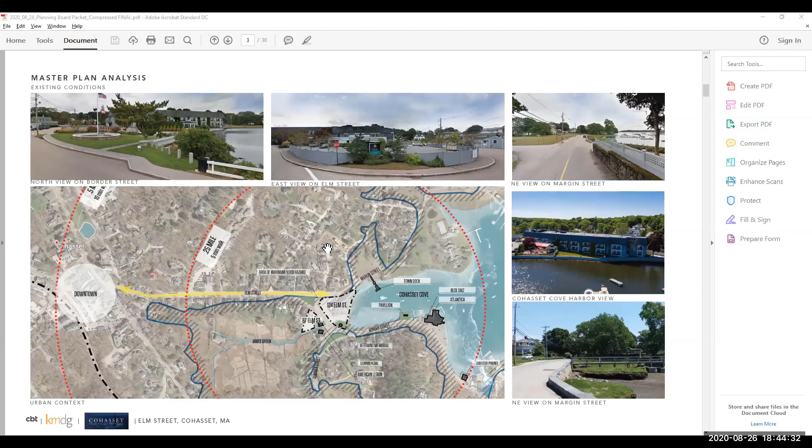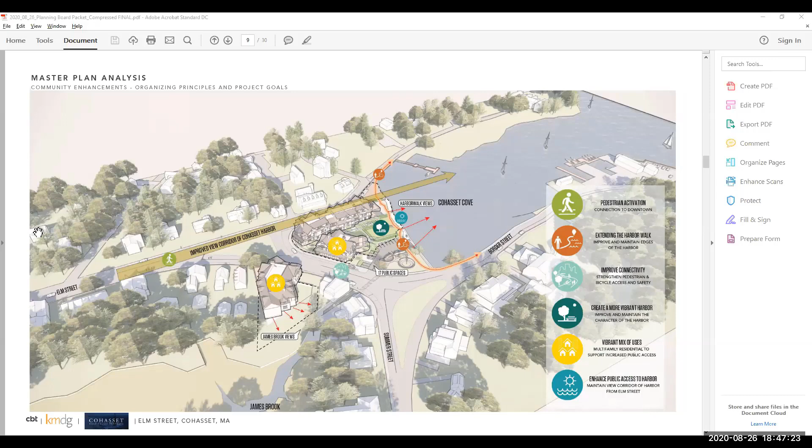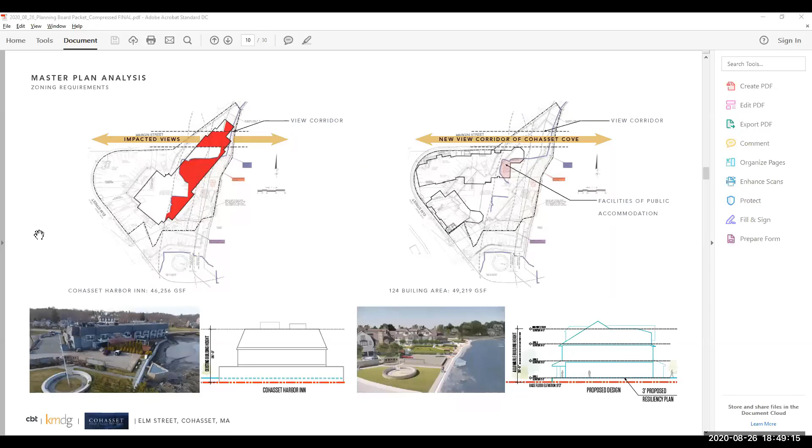You should also note that these are just diagrams. So in the diagram of the proposed, it appears that there's a flat roof condition when in fact there are really no flat roofs being proposed. Anything flat is contained within a well within the roof line, fully shielded from view. I think that swiftly gets us through that overview. And from here, I'd like to hand it off to our landscape architect partner, Jen.

Hi, I'm Jen. I'm with Klopfer Martin Design Group. I'm going to try to unpack the site plan a little bit, and in doing so address some of the questions that we heard. And so this diagram is the landscape design parameters diagram that we started out with in the beginning of the project. The red dashed line shows the Chapter 91 boundary, and within that, between the dashed line and the seawall, there are two public land zones.

There's the water dependent use zone and then the facilities of public accommodation. Within that water dependent use zone, there's the 10-foot harbor walk and the 25-foot no build setback. And then the Elm Street corridor, which is aligned with the south side of Elm Street.

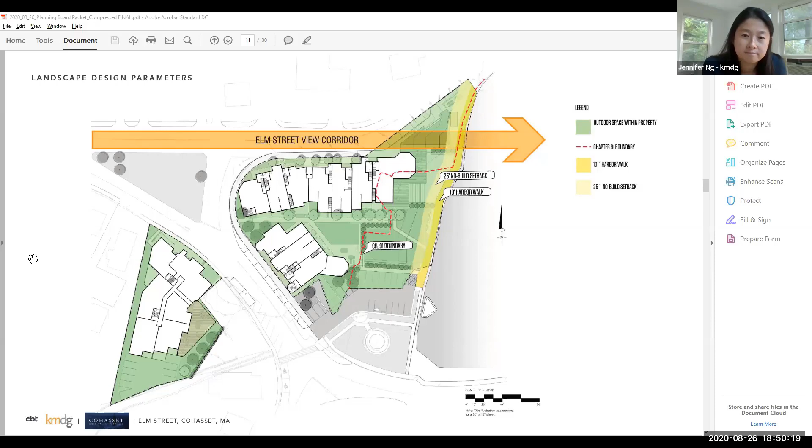One of the questions that we heard was, have we done any FEMA analysis? And we actually have done quite a bit. And so we really felt like we wanted to reveal that part of the site design a little bit. So the site sits on 3 FEMA zones, base flood elevation 11, 10, and 9. And the guideline that we're following is that the building first floor elevation needs to be a minimum of 1 foot over the base flood elevation.

So 124 Elm is actually set to elevation 12, and the landscape slopes and steps up to support that so that it's not a walled condition. And then at 87 Elm, the first floor retail is set to elevation 10, so 1 foot above. And then the residential is actually set to 15, so quite a bit above.

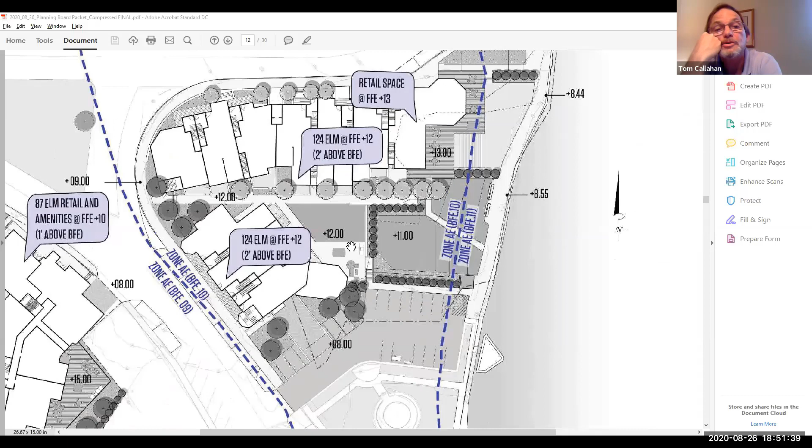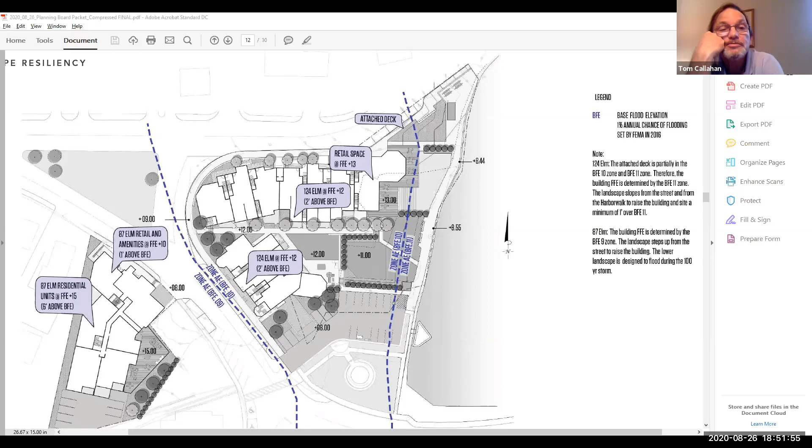So the next slide. One of the questions we heard from a number of people across both previous planning board meetings was, how do you know when you're in the public park versus the private park, and where is that line? That's a really good question, because we purposefully tried to hide that line as much as possible so that when you're in the public park, you get the shared view of what's going on in the condo area.

The other thing we wanted to show with this public open space is that we actually exceed what the Chapter 91 designation suggests, most notably in that northeast corner headed towards Margin Street.

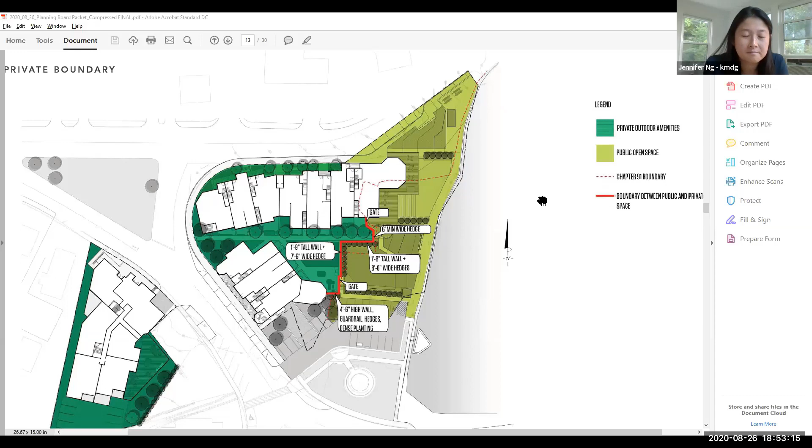So the buildings are purposefully put towards the street edge, and what we're trying to do is create a sense of a neighborhood, that the doors are facing the street, that there are more eyes on the street, and that you start to create this sort of front porch, front stoop culture where people are part of the street, not necessarily just in their homes.

And then trying to be really strategic about where we place those open spaces to further support the view corridors—not only the view corridor on Elm Street, but also the view corridor that goes right through the 124 Elm buildings, and then also through the parking lot.

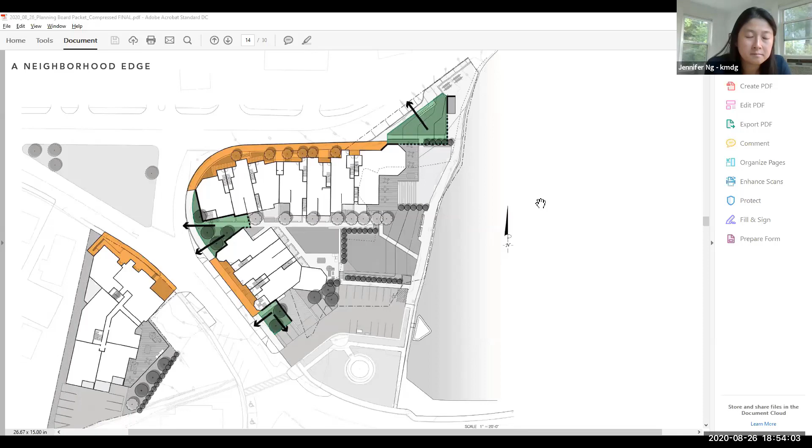So the new Harbor Walk has a series of rooms connected to it, and those rooms offer different programmatic opportunities. There's the vet park at the far end, which is not on our site but is experientially part of it, the public parking, the sloped harbor lawn, the harbor terraces which offer spill out from the retail and are more of a plaza or patio feel, and then the Margin Street Park.

And the Margin Street Park is noted where it is because as we think about seasonal or annual festivals, such as maybe the art festival, having an opportunity to have an installation or a tent or a kiosk right on the street to draw people in towards the park, we think is a good opportunity.

And then historically, the hotel is kind of right on the edge of the Margin Street property line, and so we're really trying to extend the sidewalk that's there as far as we can on our property line to help facilitate that town dock connection.

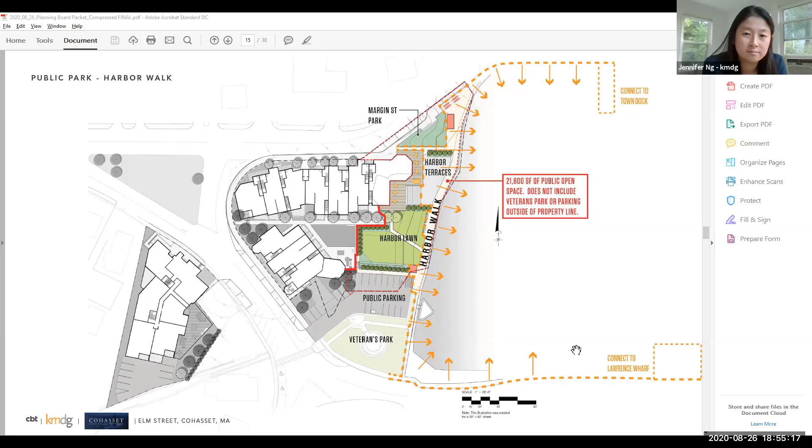And then we've already talked a lot about parking, but just wanting to reiterate that there is public parking on the site, and that it's been integrated into the public park, and that even with the additional level of resiliency we're trying to add through the FEMA analysis, we are committed to an accessible path of travel that gets you to the retail zone.

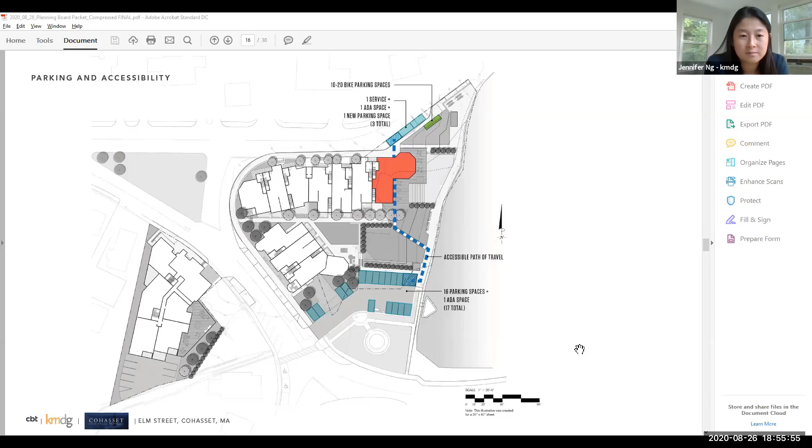So this is the illustrative site plan, and hopefully it kind of helps to unpack it a little bit more, answer some of the initial questions, and keep the conversation going.

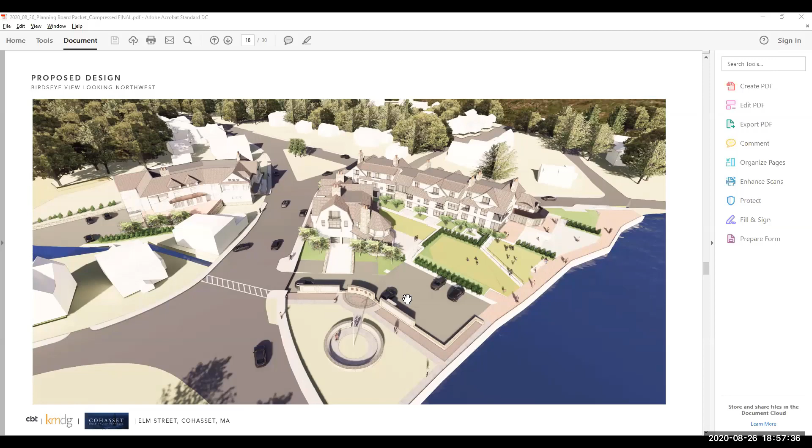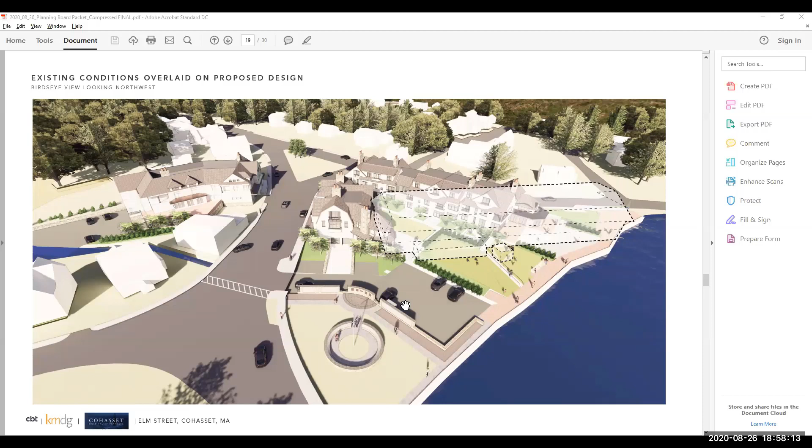This next slide is the exact same view superimposed with the existing massing of the hotel. We've heard plenty of conversations before about what the comparison is, and this is meant to offer a quick look at the two in conjunction. As you can see, the mass of the form that exists today imposes upon any views laterally across the site, down the view corridor of Elm, or through the center, and certainly doesn't afford the same integration at the water's edge.

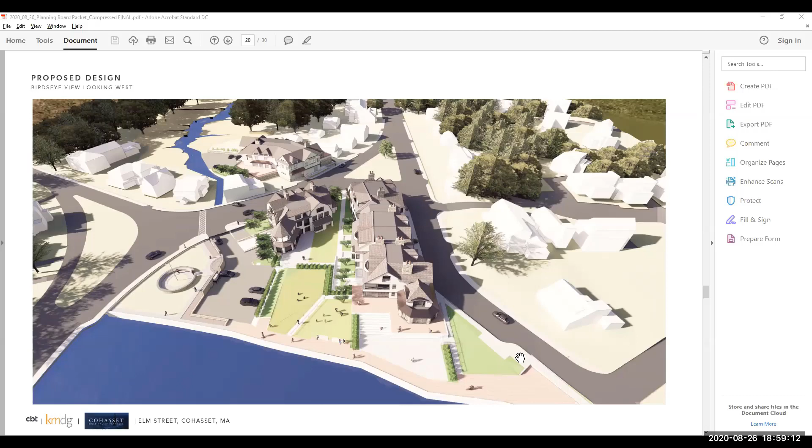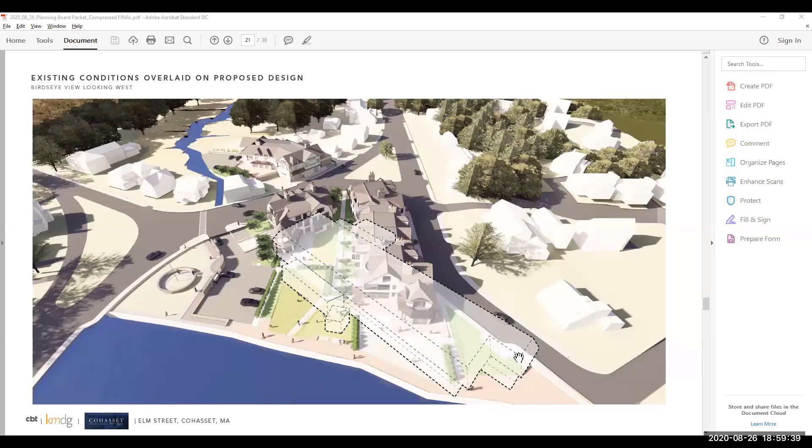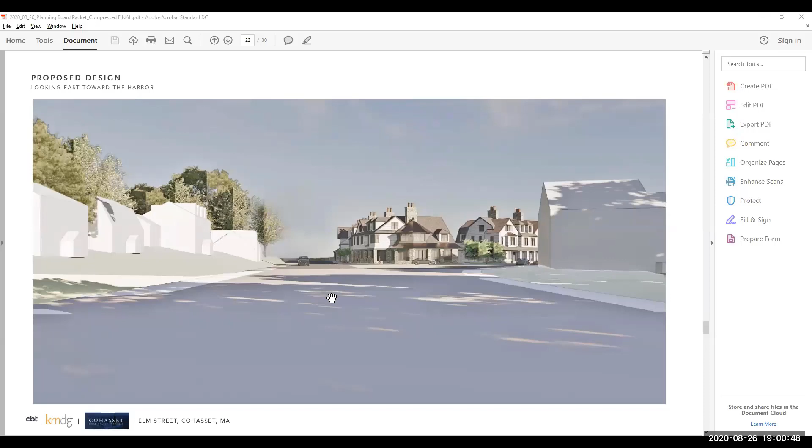In comparison to this real life photograph, here is our proposed view, which clearly illustrates the opening at the water's edge and into the harbor for a view corridor. It demonstrates how the residential form of the proposed building at 124 frames this view in compatibility with the residential profiles on the north side of Elm Street, in a very suitable, expected neighborhood fashion.

Continuing closer down Elm, we see that same effect, and you begin to get a feel for the architecture and the profiles offered at 124. You can see how the edges are softened and everything is moving back away from the street while still offering that pedestrian scale.

Another pedestrian look at Elm Street as the road begins to bend to the south. In this image, note the sensitivity to the existing neighborhood fabric and scale, the use of materials - stone, wood shingles, painted trim, copper, glass - and the proposed relief across the facade, with openings at the street level, recessed elements, and stepping back along each face. Note also the accent detailing and the careful roof design, inclusive of chimneys, gables and gambrels, dormer features, and the roof elements dressed in a soft edge as it transitions to the body of the house.

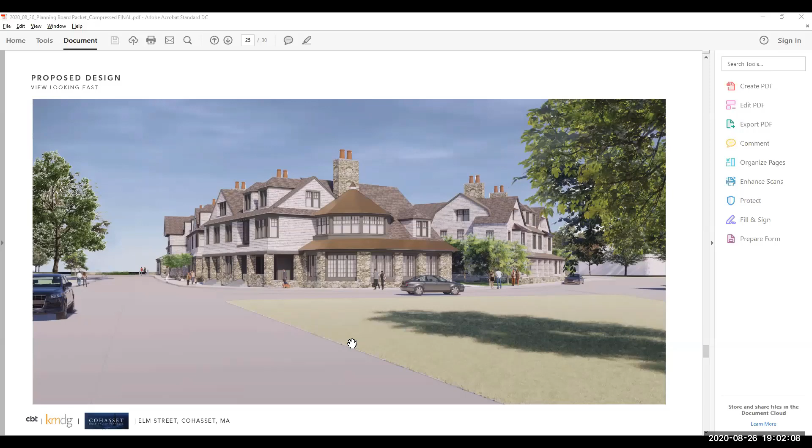This future vision depicts our full engagement: the harbor, the public, the residential element, the amenities, all existing together in a certain harmony - a vision for what could be here at this corner.

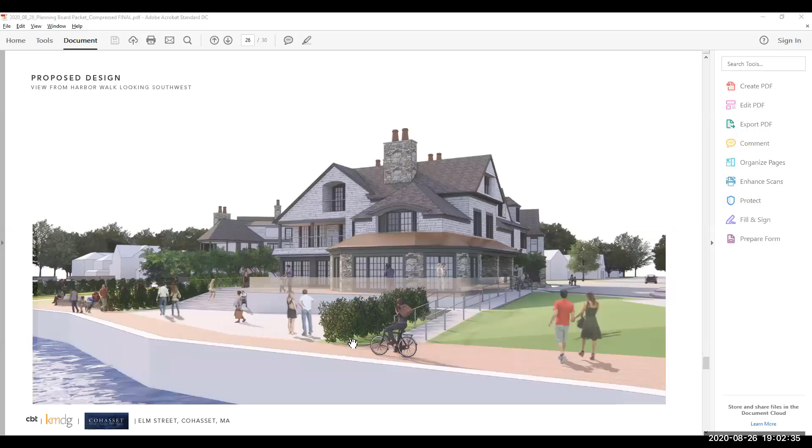Then we consider 87 Elm from a different position - this perspective is a pedestrian view on Summer Street, looking to the north or northwest, with the Legion building in the foreground to the left. The proposed 87 and 124 residential forms nest on either side of the street in respect to one another.

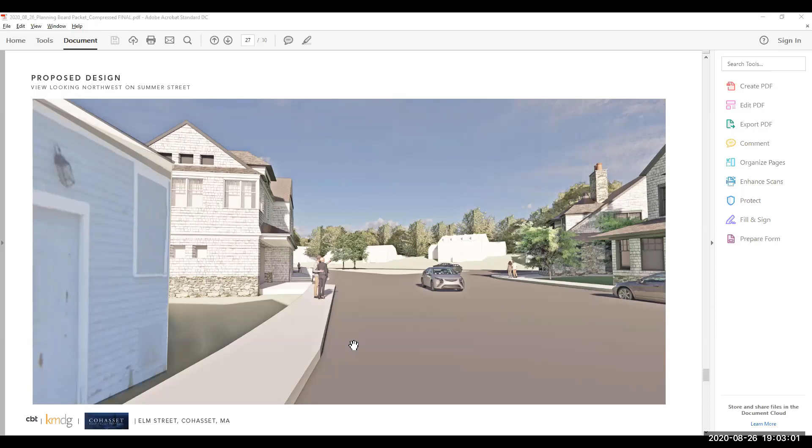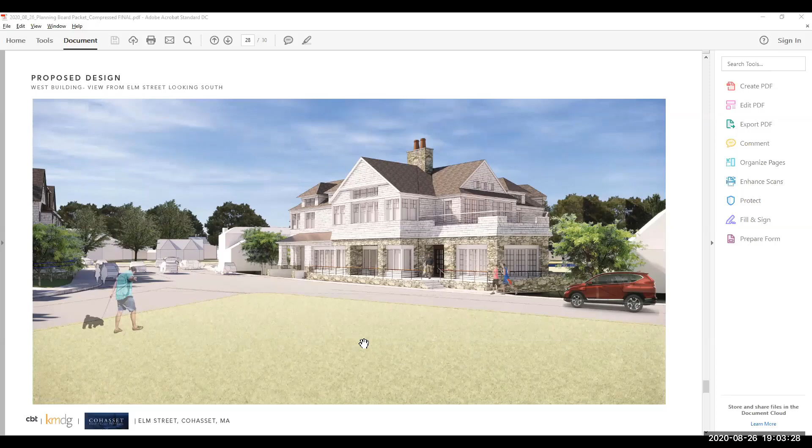From the Island Green at Elm and Margin Street, we see these classic expected roof lines at 87, the strong chimney, the New England wood shingles, and the stone palette in harmony - a compilation in keeping with and complementing its neighbors, both here immediately and throughout the Cohasset community.

To conclude, this aerial photograph as it is today shows the hotel as graphically represented in the earlier SketchUp models, followed by the same beautiful photograph of Cohasset Cove as proposed.

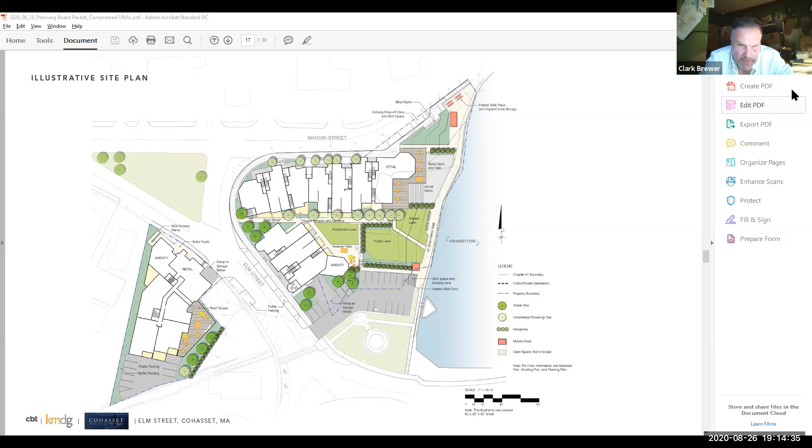Well, I understand, like at Harvard Yard, all those paths were created by people walking on the grass, and then they paved them over because there was nothing they could do to stop people from walking. But in this case, you're creating this large public space, but then you're bisecting it with raised guardrails and handrails, and so if you're rethinking that, that makes sense to me. Yes, we are rethinking that. Okay.

Is that all your comments, Clark? Those were my comments. Oh, one more: I didn't see a detail of the guardrail that goes to the ramp into the parking area. I'm sure there'll be one, but I think it makes sense to show the board what that looks like at some point. All right. So let's move on to allow the peer review to make the presentation. Can I ask just a question? Yes, you can ask the factual question.

All right, so Jennifer, when you were talking about where the first floors of the proposed buildings are, I believe you said they were anywhere from elevation 9 to 15. Is that correct? So 87 Elm, the ground floor retail is set to elevation 10, and then there is an interior stair and elevator that takes you to the units, which is at elevation 15. And then the other building? In 124 Elm, the ground floor units are set to elevation 12, and Sean, feel free to correct me if I'm misquoting. No, those are the correct numbers, yes.

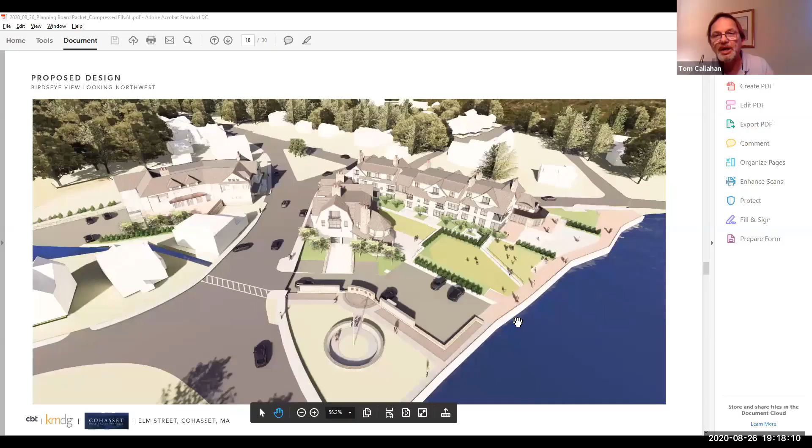for example, when you go back quickly to the dotted line of the footprint of the existing building, do I know that's the scale compared to your new building? I don't know that. That's for our consultants to verify for me. But my concern has been that people in this community understand what's going to be put there compared to what's now. The biggest complaint is it's a wall. Well, it's an ugly wall, and this is just a new, prettier wall.

But I want people to get a sense of the scale and the size of this compared to what's there today. So we're really talking about superimposing that screened image. In that view you're showing right now, where's the hotel compared to that? In true scale, I don't want you to say that the hotel is massively larger if it's not massively larger. It's certainly shorter than the existing building.

But I would love to see that, not so much for me as for the community, because I don't think people appreciate this. I got a call this week from a citizen: approve this, you should approve it quickly. No, I shouldn't approve it quickly because I don't think everybody understands what the replacement is going to look like. And this is for the next 50 to 100 years, so we need to do it right. And we have that technology, so I'd love to see it.

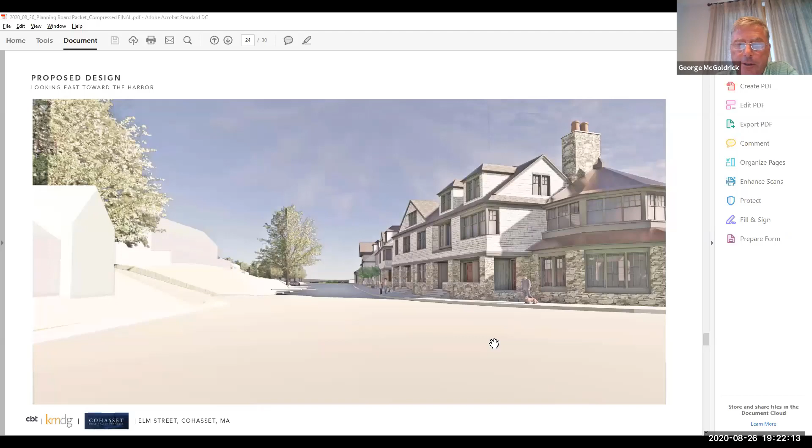And one of the things that we were looking to do was to get examples of the size of the buildings. So if you go stand at Pilgrim Bank, you can get a sense of what the height is from the street. If you stand in front of the Red Lion, that's higher than what's going to be there. So we will attempt, Madam Chairman, to answer the question for the board member about doing it in plan, but it's probably going to be easier if we point out locations in town where you can actually stand and get a sense of the height.

You can also stand at the very end of Margin Street now, where the building is now. And that's generally the height's going to be, but it's going to be further back, away from the water, and all of that's being open. So we'll address that and get some examples for you. All right.

Tom is, let's see. Eric, would you have any comments? No, I don't have any comments at this time, Madam Chair. Okay. Paul Grady, do you have any comments? No, no comments right now. All right. Then let's move to the peer review discussion, please. Lauren, would you like to introduce our peer reviewers?

Yes, thank you. I'd like to introduce Darren Kirkjian. He is the lead of our team from Weston and Sampson. I'll have Darren introduce the rest of his team members and he'll begin the presentation. Thank you. Thanks, Lauren. I'm Darren Kirkjian, the project manager from Weston and Sampson. Also on the call today from our team is Jim Reardon, our senior technical lead, as well as Caroline Wells, our senior planner, and Miguel Pimentel, the architect, who will present the architectural review. I'm going to share my screen so we can have our slides up.

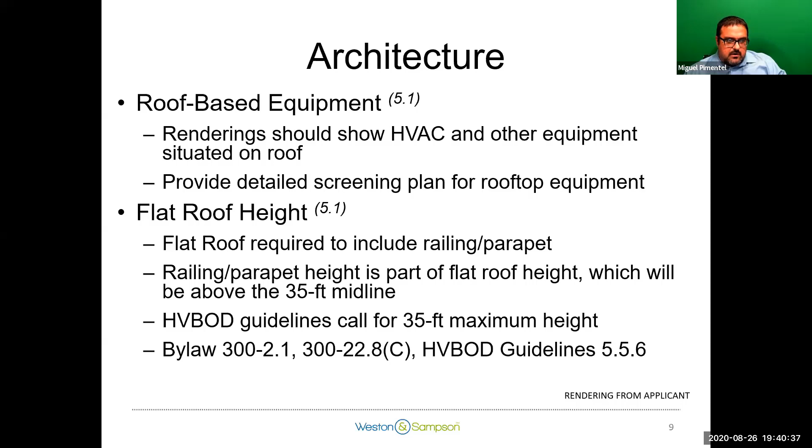On top of that, going to the previous point, the equipment that is going to be on the roof is going to need railings, and the criteria for the roof heights mention that the railing is going to be part of the roof height. The only thing that is excluded is chimneys and stacks.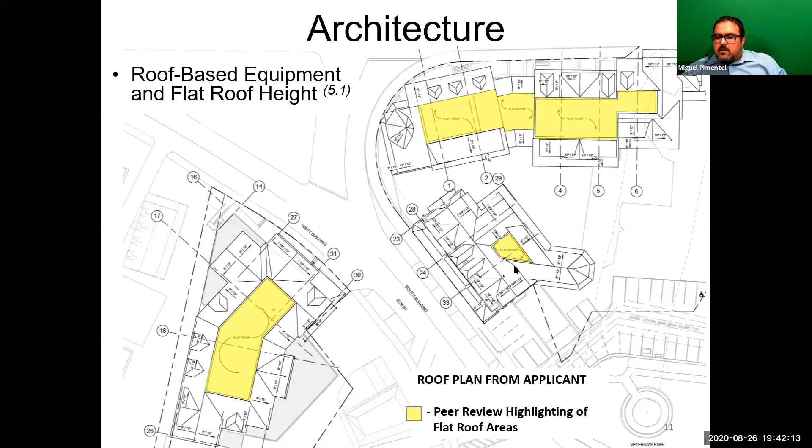On 87, I think they're actually sunken in way below that level, and I think that's not going to be an issue. And also on the small building that is next to 124, that's separated, right? That one I believe is sunken in also. So yeah, you can see in that perspective that's been shared, the roof on the right side, as seen from the street, is sunken in behind a ridge line, which will probably be okay. It's going to be under 5 feet.

But the roofs on the main building on 124 are pretty much level with the ridge line. So that was just our concern. We wanted to bring it up and make sure that, you know, this thing is getting built and this doesn't get brought up later on.

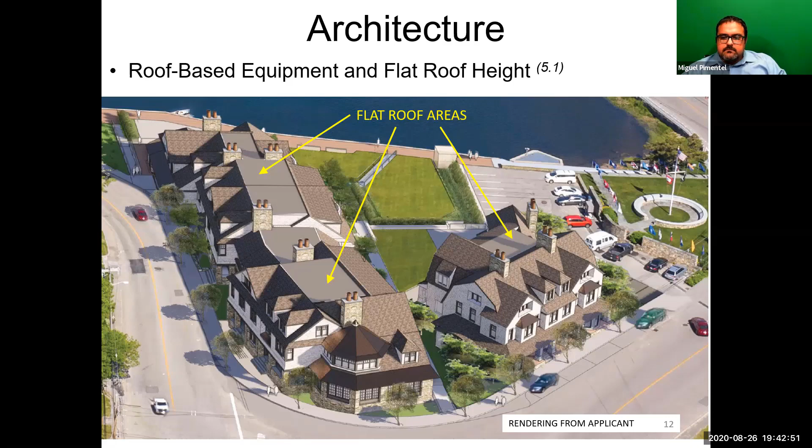So, and then going on to the next, residential and non-residential units for ventilation. We didn't see any space taken for stacks or vertical ventilation on the plans. So we're just concerned how the building is getting ventilated, especially also the parking underneath. So we just want to make sure that's something that's been taken into consideration.

Clarification on the HVAC system, we would like to see some of that, and provide detail on how the fresh air intake, especially on the garage, is being accomplished.

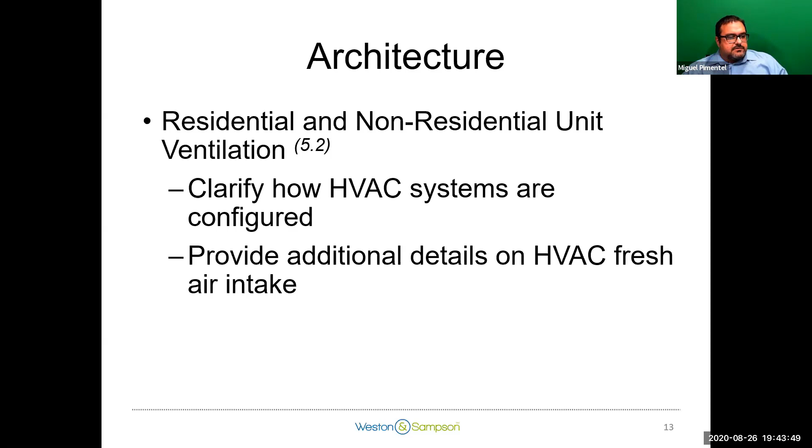So there is a space on 124 and also on 87 slated for public spaces, restaurants, we're not sure because they're not labeled, but if they're restaurants, we would like to see how those stacks for the kitchen are shown on the roof line, and fire separation, to make sure that they're safe and they comply with rules and regulations.

And then lastly, clarifying the underground parking ventilation. What I took from looking at some of the drawings is that the parking at 87 could be considered an open parking structure if more than 20% of the exterior perimeter of the walls is open. And I'm not sure that's going to be the case since you have a gate. I'm not sure if the gate is open. There's not a lot of detail on that in the front or the back. So calculations on that will need to be made to see if that structure is going to classify it as

an open structure. The one on 124, from what I could gather, will be considered an enclosed parking structure, and it will need significant ventilation. So again, on the plans, we didn't see stacks in the floor plans for mechanical ventilation. I don't know if you guys will be planning to use fans mounted in the actual parking garage, which is an option. But I didn't see any information either way, and I didn't want to just take anything for granted.

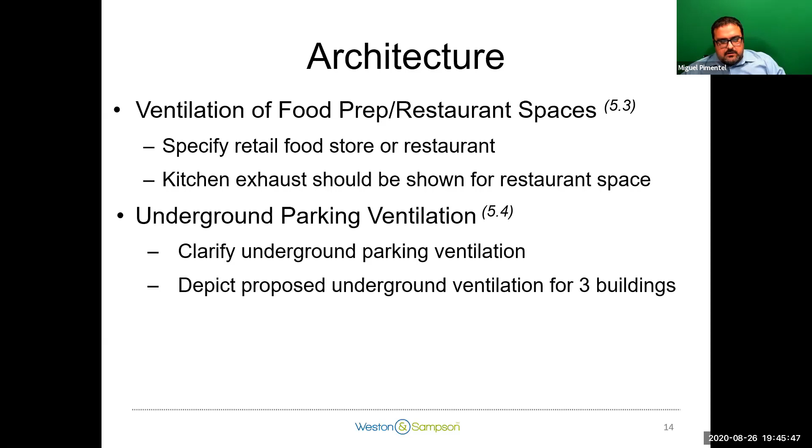And another point was the electrical transformers. They're not shown on site, and just to be on the side of caution, these things will come in later on as a final product, and somebody might be shocked at seeing on the sidewalk or someplace in the public area a big transformer or a generator if needed. My guess is that the generator will not be put on the sidewalk, but a transformer will have chances to be on the sidewalk or a pole. So a drawing depicting where that equipment is planned to go will be nice.

And lastly, another point that will be touched on by the landscape folks will be the underground parking flooding equipment location. You're showing at this point some elevators and access to the underground parking, which in a case of flooding will be impacted. And we just want to know if you guys are taking any measures to make sure that the flooding doesn't happen in the first place. And if it happens, what are the measures taken to mitigate that?

And another point is the ADA access to the parking in the back of 87 Elm Street. That parking is a public access parking, but it wasn't clear looking at some of the drawings. In some drawings, it's shown green, which means it's a grass paved area, and in some of the drawings, it's shown as paved. And if it's gravel, I had concern about somebody on a cart or unloading a wheelchair. How do they get to the front, to the entrance?

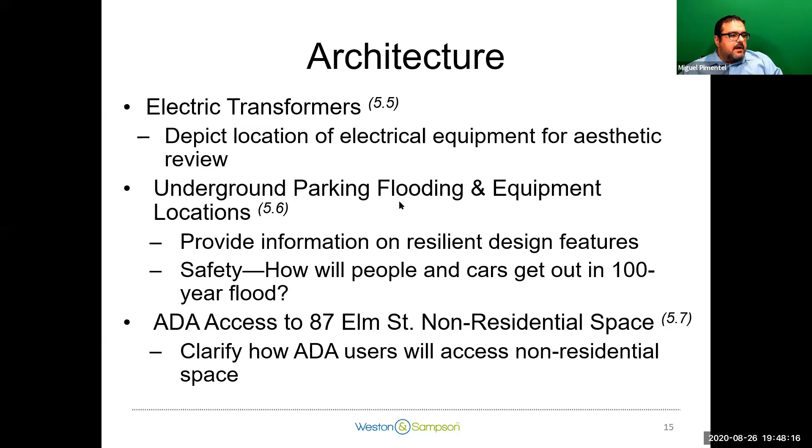And also, are people going through the ramp, through the front, to access the amenities on 87 Elm Street, or are they going just through the little lobby that you show on the ground level, through the elevator and up to the amenities? So that was another thing that wasn't too clear, and we want a clarification on that also. And I believe that was the last point on our end on architecture. So I'll turn it over to Daron.

Yep, thank you, Miguel. So just to wrap up our presentation, we wanted to highlight a few of the landscape architecture items that we had comments on. We had our landscape architect team review the site plans and renderings. One of those items, which was addressed already by the applicant, was the consideration of flooding of the landscaped areas and making sure the plantings are selected to be appropriate for a marine environment. In addition, on the planting palette, the town has provided on their website a native species list, as well as the ConCom has a coastal bank species list. I just wanted to highlight that to the applicant if useful.

And then on the walkways and sidewalks, looking at the HVBOD guidelines, masonry pavers and concrete construction, adding a mix of materials, are recommended. So we wanted to see clarification from the applicant of what their planned surfacing is. It looked like it was mostly bituminous, so we just wanted to check on that. And then all the walkways and sidewalks will also have to have lighting, and we do understand the applicant is in the process of preparing a lighting plan. So we just wanted to request that it includes walkway lighting.

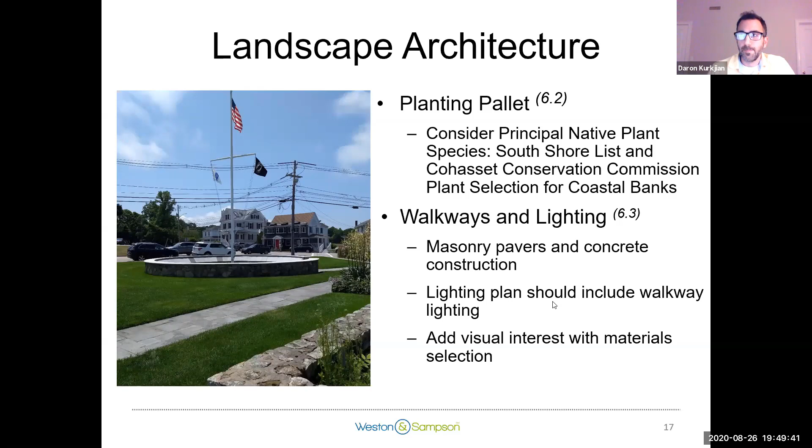I believe this was actually shown in some of the renderings today that look updated. We did have a question — some of the previous renderings showed trees in the sidewalk, while some plan views showed them within the property. We wanted to clarify the location of those trees, because the HVBOD guidelines require that tree plantings within sidewalks have grates, along with some additional requirements, or be in a landscaped area rather than an impermeable area.

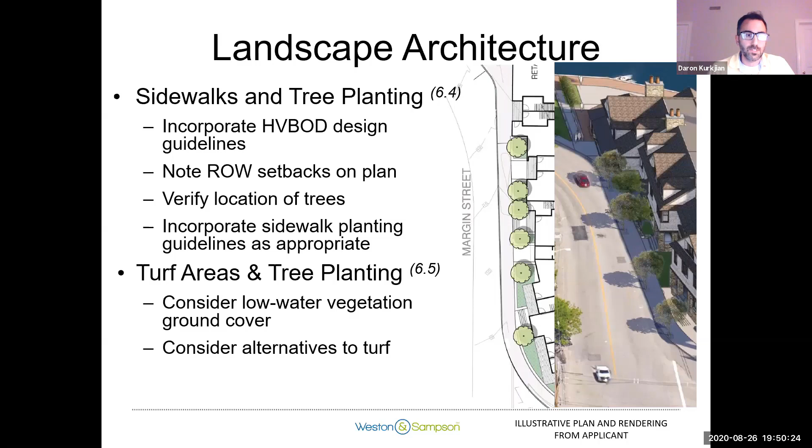Continuing quickly through these, the turf area — the HVBOD guidelines also recommend low water vegetation, so we're proposing alternatives to turf that may have lower water requirements. That builds into one of our last requirements: that the applicant prepare a maintenance plan for the landscaped areas, especially since, in the previous hearing, the retail or non-residential space is being offset by the public use park.

We want to make sure there's a maintenance plan for operations and upkeep, so plantings can be replaced if they're dying off. We've provided clarification in the memo on what that may entail, but we recommend it be provided. Signage has come up previously in our parking discussions, but we wanted to bring it up again — recommendations for signage following the HVBOD guidelines, wayfinding signage especially with the public coming to the park, potential kiosks, and if there's access to the dock for kayaks and other items, we'd want to see the signage plan. Lastly, on the landscape architect items, service and loading areas — we wanted to clarify where those are shown on some plans, and confirm they have the required screening recommended in the HVBOD guidelines.

So with that, I know that'll prompt a fair amount of discussion, but we wanted to thank everyone for your time, and we're certainly available for questions.

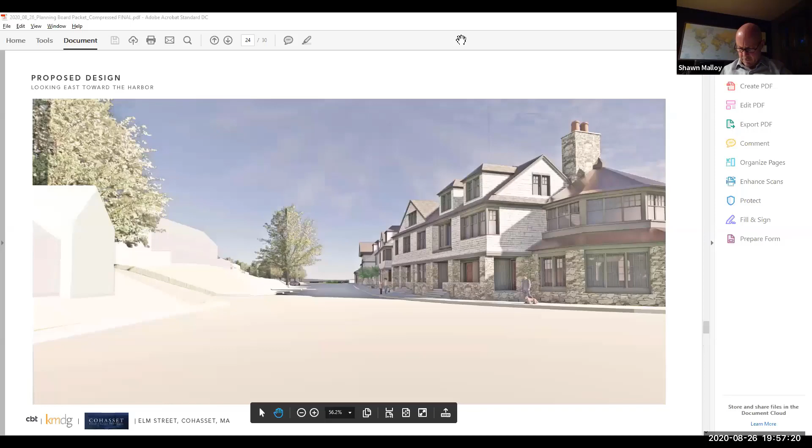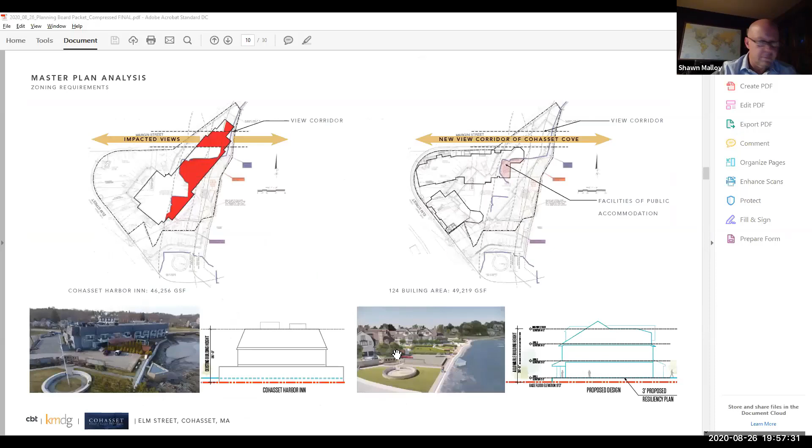So as we can see, just in simple diagram form, we've attempted to model our profiles at the extreme points versus the existing. Approximately a 5-foot differential exists between our absolute ridge at the tallest point versus the ridge of the hotel, but not taking into account the additional outbuilding structures on the roof of the hotel. Okay, does that answer your question, Tom? Yes, it does. Thanks.

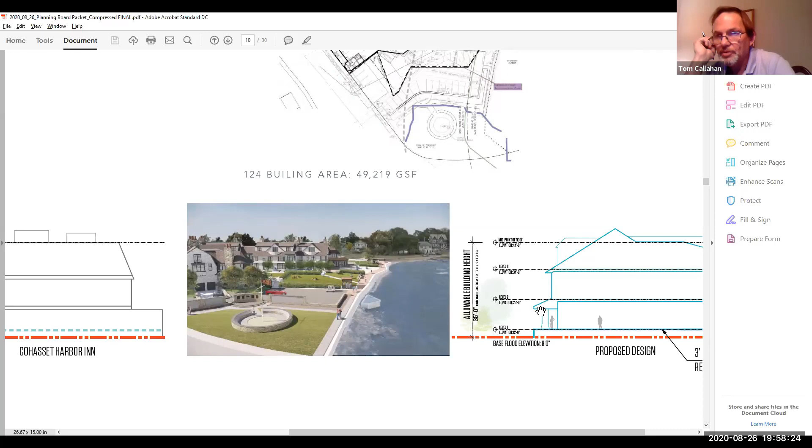Madam Chairman, can I ask a different question? It's a little off topic, but it goes to something George mentioned at the beginning of this presentation. Yeah, we're doing okay for time. You can do that.

George had mentioned that the site ownership changed hands. I looked it up, and yes, it did on the 11th. But it also made me look just now to see what was going on with the lawsuit between Mr. Roy and Mr. Wardlehigh, and there was also activity in that lawsuit on the 11th and 13th. I'm wondering if either George or Adam can speak to what was the result of the hearings, and is there any more threat of Mr. Roy having an attachment on this property as a result?

So hold on, sorry, the echo chamber. So we had agreed to not record the deeds until they had at least some preliminary action on their lawsuit between themselves. We did that as a favor to both of them, because it didn't impact us at the time. Now that we're a year and a half down the road, we had always had control of it. I forget the exact term the lawyers used, Adam knows it, but the recording of the deeds was just being held in escrow. So all that's happened in the last week is it just finally made it out of escrow and they were recorded. So I'm assuming you all wouldn't have taken title if there was any threat.